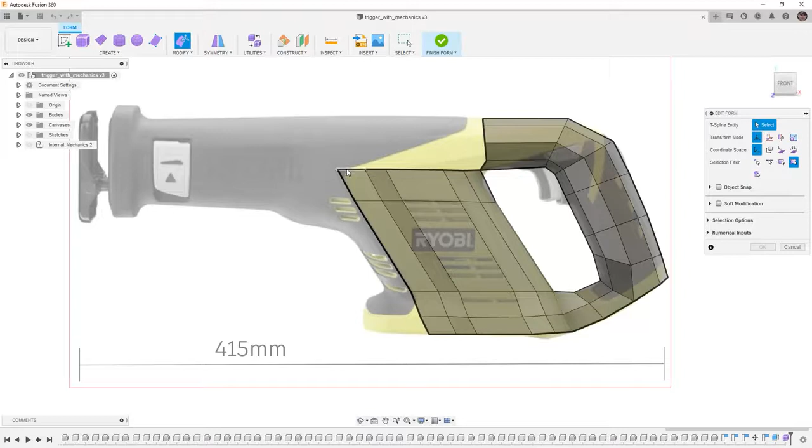We're going to go right back into edit form, and we want to grab all of these upper edges. Once again, we can double click to get the entire loop. We're going to hold down Alt on the keyboard, and we're going to bring this up. I'm going to do this a few more times. And what I'm trying to do is I'm trying to match the shape of the handle.

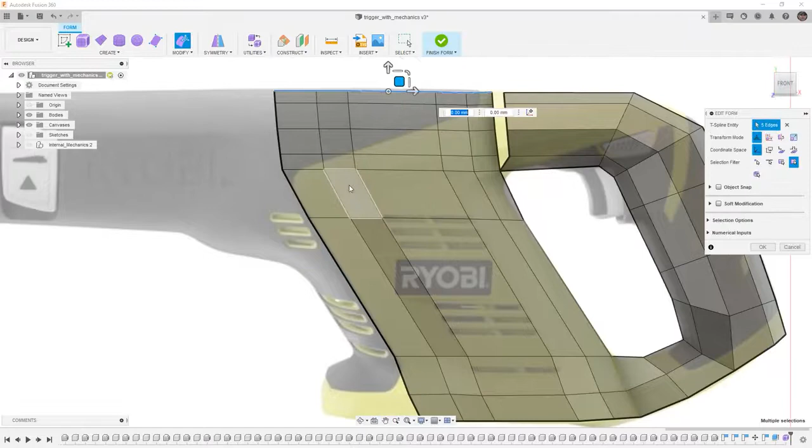Keep in mind that as we're doing this, if we rotate this model around, what we're actually doing is we're bringing this entire piece up. Now, when we look at this, this is obviously problematic because it's not going to be a smooth blend between here. Now, when we did this on the bottom, we used bridge, and you can see that this bottom edge is actually pinched in a little bit.

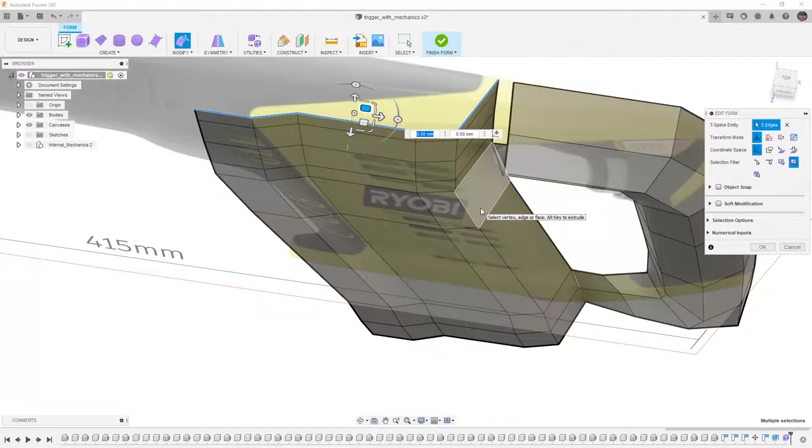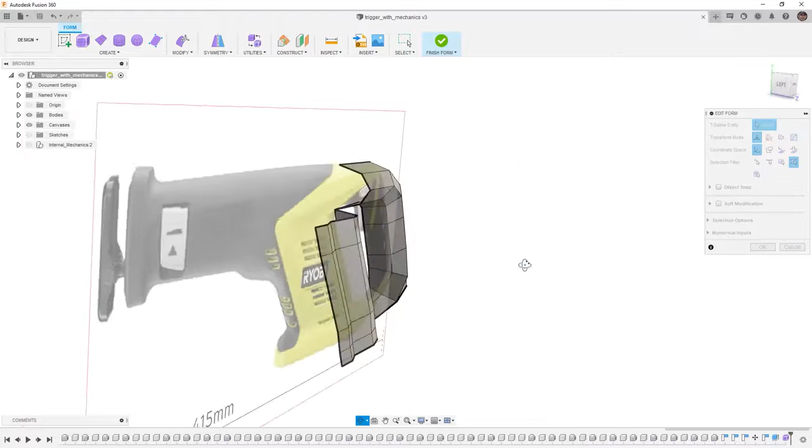So let's take a second to step back and understand that when we're working from a side view like this from 2D, it's a little bit more difficult for us to envision what the 3D shape is going to look like. Because of that, I'm going to use Control Z and undo back to this point. And now that I'm aware that things are in 3D and they're not quite lined up how I would expect, what I'm going to do is I'm going to come back and I'm going to move some of these edges out to get a better shape.

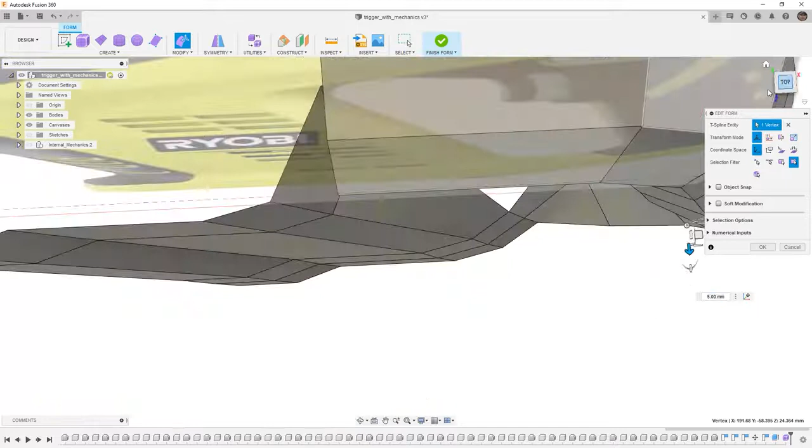So I want to pull this edge out, and this bottom vertex here, I'm going to pull this out. And once we get a few of these out, what we can actually do is go to a top view. And you can see here the handle is obscuring this, but what we need is we need to pull some of this geometry out so that we're happier with the 3D shape.

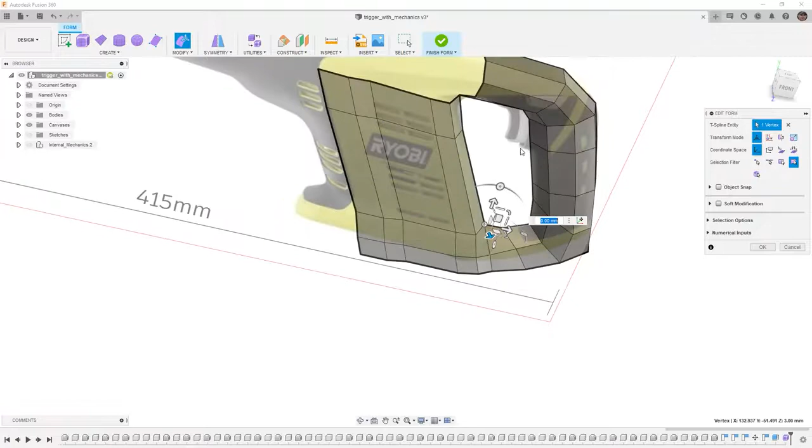Let's go ahead, and this point is going to have to be on the midline. It's going to have to be all the way in. We might need to add a few more edges or a few more ridges in here to get the entire shape that we're looking for. But right now, this gets us pretty close. Let's just make sure that this bottom edge is pretty flat and how it rotates in is okay. And then maybe we'll take this one point and we'll bring that out a little bit more.

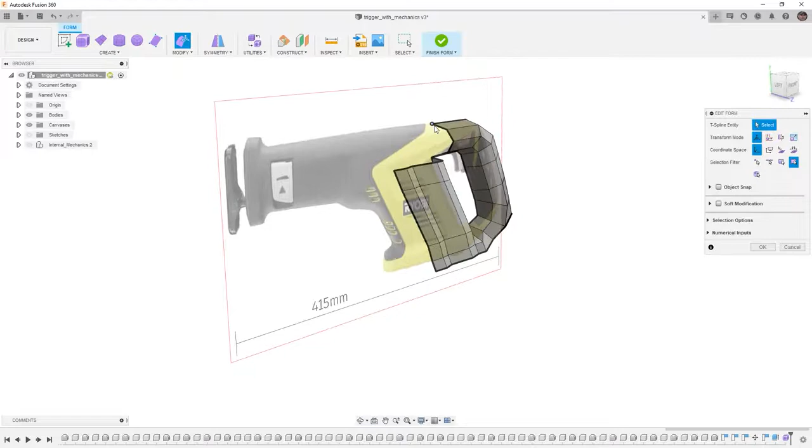So now that we have that bottom pulled out, knowing that we can go back, let's take a look at how we can blend these shapes together. So I'm going to use a tool that we haven't used yet, and that's Merge Edge. So I'm going to select Edge 1 and Edge 2, and I'm going to allow them to be merged together. So you can see that's very similar to us welding those vertices together. It was able to take those two edges and simply pull them together and get us that nice smooth division.

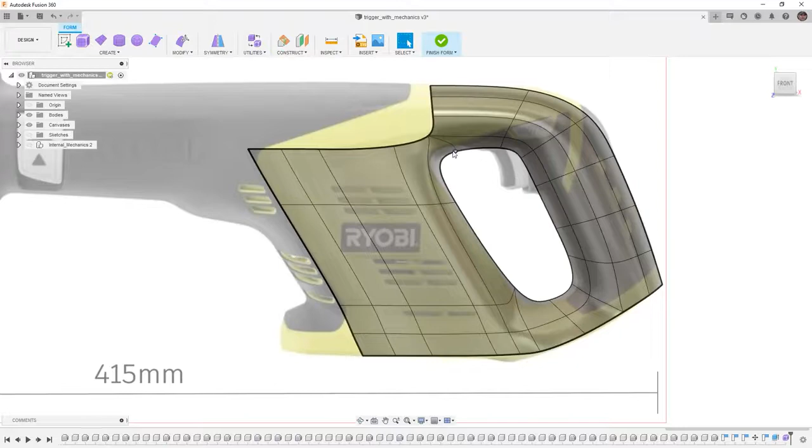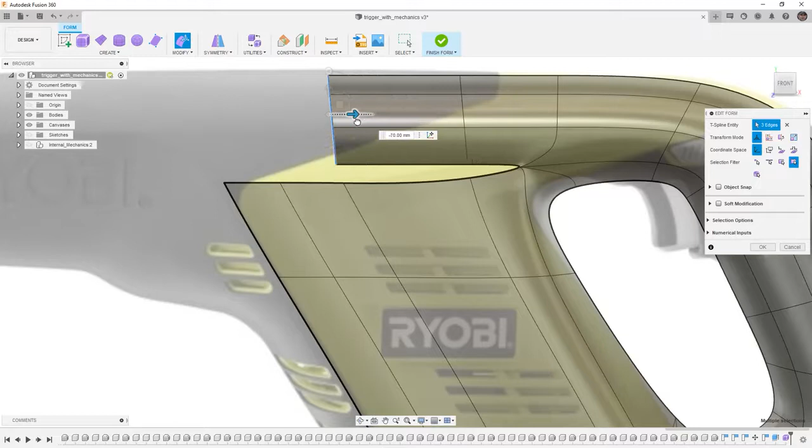Now that we know that we've got this rounded portion here, what I'm going to do is use Modify, Edit Form, and I'm going to take a few of these edges. I'm going to go to a front view. I'm going to begin extruding them forward. I want to make sure that I roughly match where these divisions are. So every time I get close to one, I'm going to let go of Alt. Then I'm going to hold Alt down and do it again. Let go of Alt, hold it down again, and then we'll do it one more time until we have the same number.

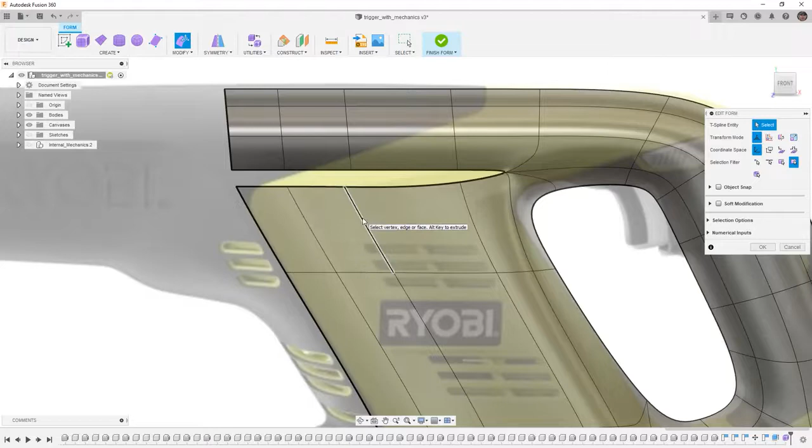One thing that's great about the T-splines functionality that we're using here with these form tools is that we don't necessarily have to have the same number, but in terms of the surface quality and the best practices, we do want to make sure that we are trying to stick to four-sided patches.

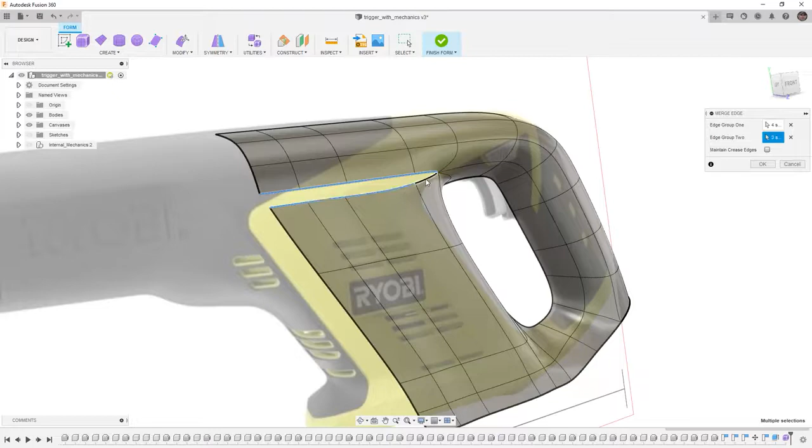What I want to do here now that I have these edges is I'm going to select multiples and I want to pull them out to be a little bit closer to this shape. Then I want to go in and I want to use that merge edge. So for edge group 1, I want to select these 4, and for edge group 2, I'm going to select these 3. I'm going to say OK and allow it to put those together.

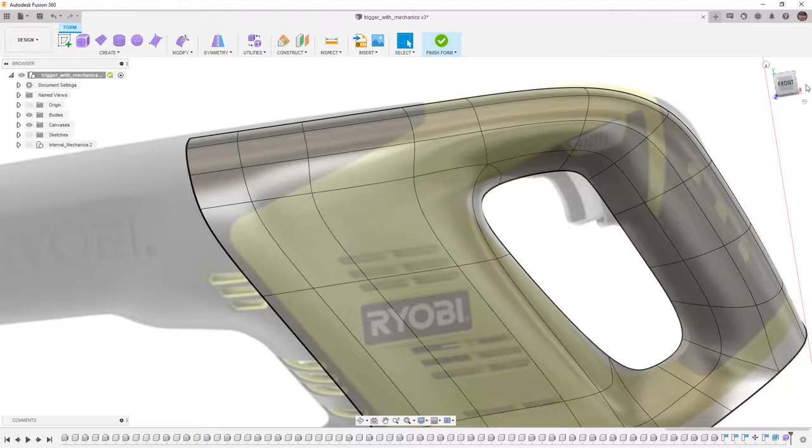One thing you'll notice that happened is it welded those together, and even though we had the same number of divisions, you'll notice that those vertices are not aligned. So if we come back in and we use weld vertices, I can put those two together. If I try to select more, you can see that it's allowing me to just continue to make those selections and smooth out those divisions that we created.

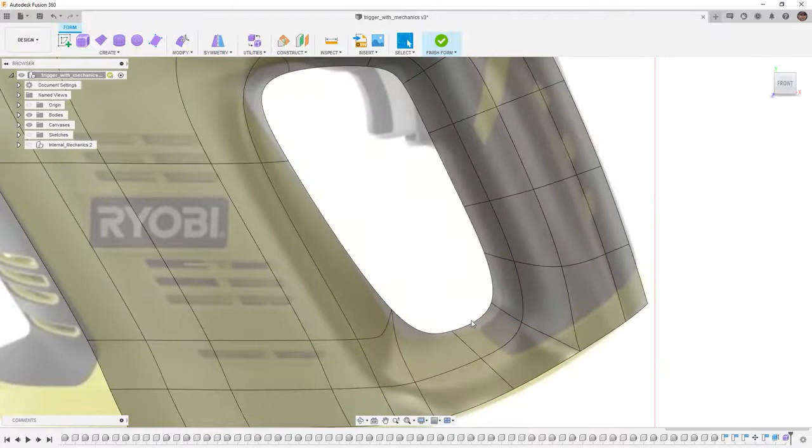Now it's important that we stick with these quad-sided patches, those four-sided patches, and then any additional loops that we might want to add or any additional changes that we might want to make, we can do that at any point in time. We can always come back and make edits, but it's important that we get fairly close to our shape with the fewest number.

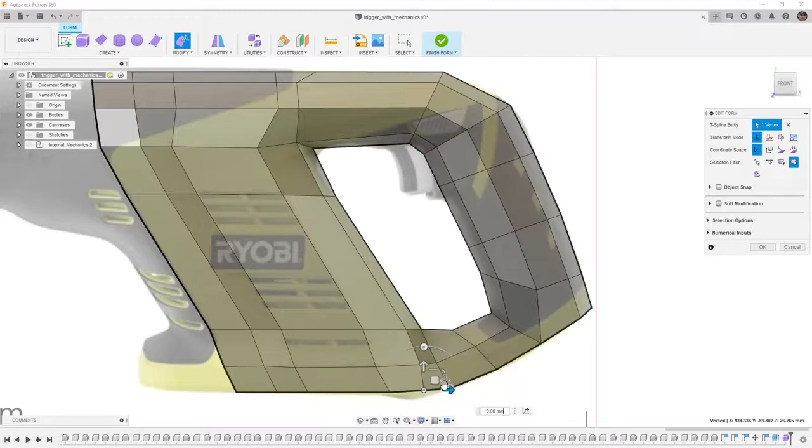So again, going back and forth between the display modes, I'm going to come back in here. I'm going to start pulling some of these forward. I want to make sure that the underlying shape is matching what I expect. So some things will get pulled back, some things will get pulled forward, and I really want to try to smooth out or normalize this shape. This edge here probably can come up a little bit. So I'm going to shift select or control select multiples. Then I'm going to pull that up.

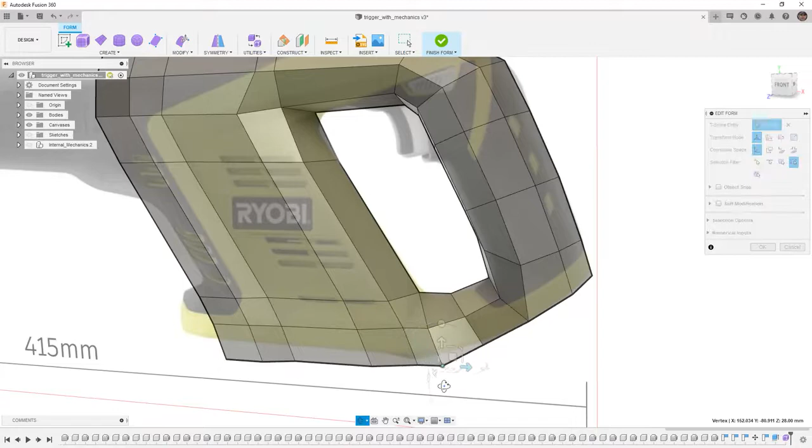Then I want to take this one here and just simply pull it back a little bit. And I'll do the same thing with this, keeping in mind that we can move around in plane. And that's going to be a great option whenever you want to stick to like an XY plane or an XZ plane. Then I'll go back and forth between that smooth display and that box display to make sure that what I'm doing here looks pretty good.

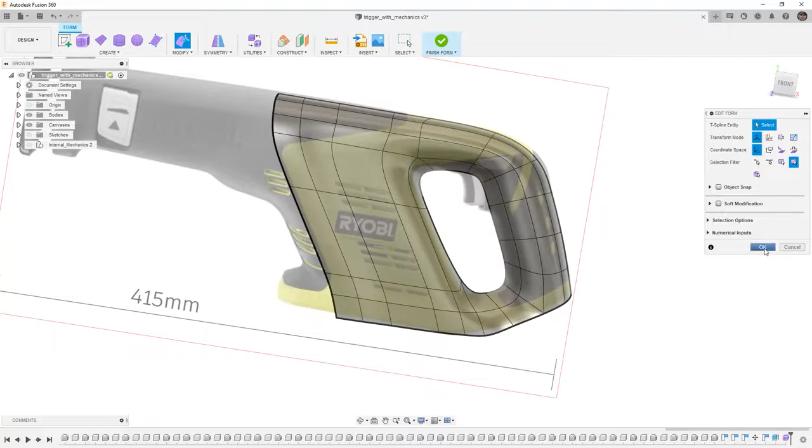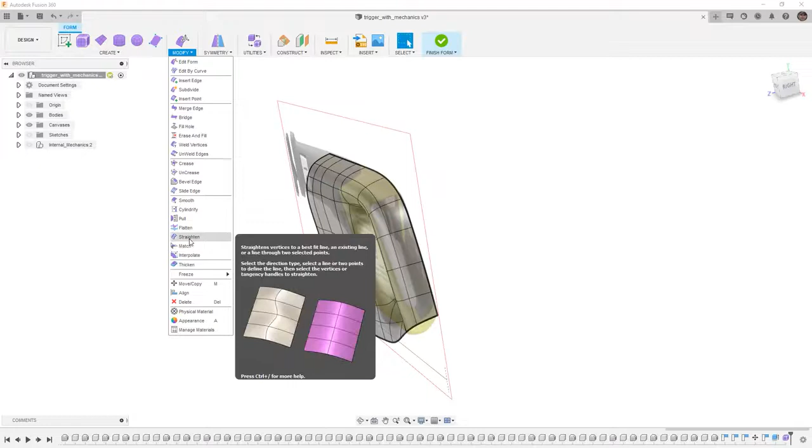There is a lot more that we can do to this body, but we're going to stop at this point because we want to mirror it to the other side and we want to thicken it into something that we can use. So the first thing that I want to do is I'm going to go to Modify and select Flatten. Now when we look in here, we've got a couple options that seem like they might work. Match will let us match a sketch. Straighten will let us sort of straighten the underlying edges. But Flatten will let us pull all of these edges, these ones that are on the inside, to that midplane.

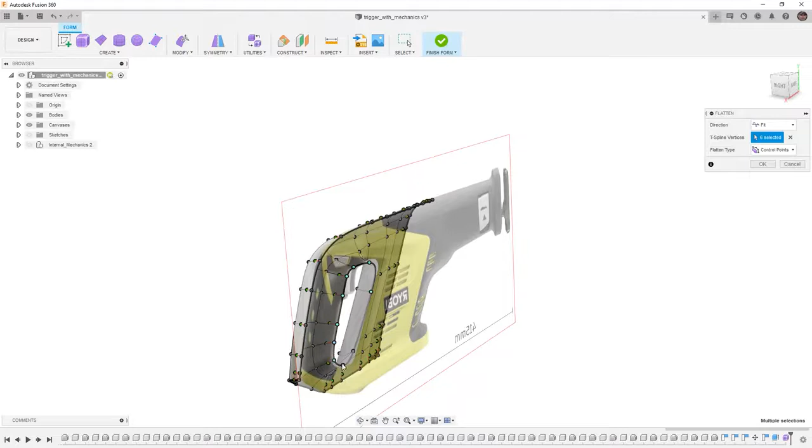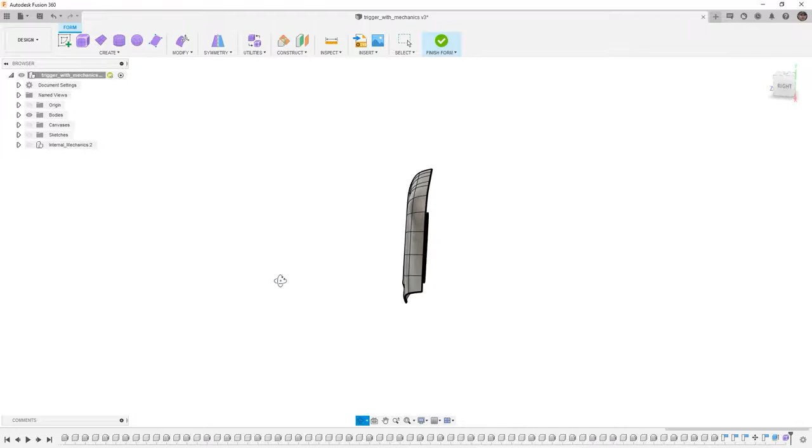So what I want to do is grab all of the edges that I'm interested in. In this case, these are going to be all the different vertices that are on this inside of the handle. And I want to pull it to a selected plane, all the way into this XY plane. And again, I can do this with any number that I need, but I'm going to do this in two separate operations. So now that I have those, I want to go into my canvases and just hide the canvas for right now. And I'm going to go to symmetry.

Now, when we have symmetry, this means that we can just manipulate the vertices, the edges, the faces on one side, and the same change will happen on the other side. This is a great way to model objects like this where they're symmetric almost completely. Now, of course, there's a locking mechanism that's only on one side of this, or the trigger might be on one side.

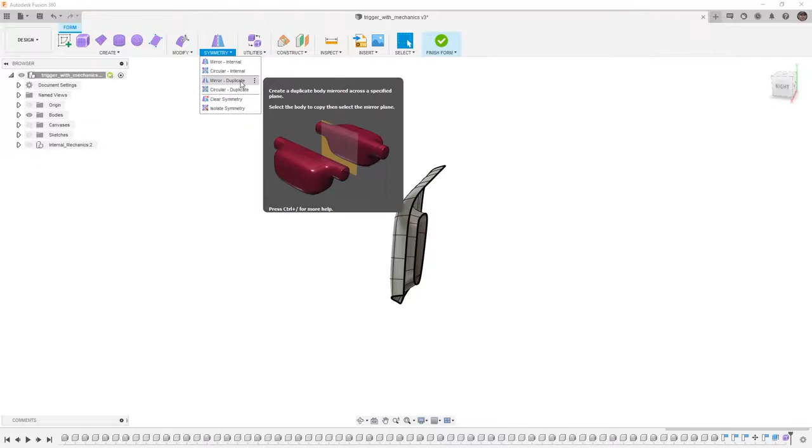But for the most part, when you're creating the basis of these designs, you want to use the symmetry whenever possible. So there are two different ways that we can do this. We've got mirror internal and mirror duplicate. Now, while it might seem like internal is the right choice here, we're actually going to be using mirror duplicate.

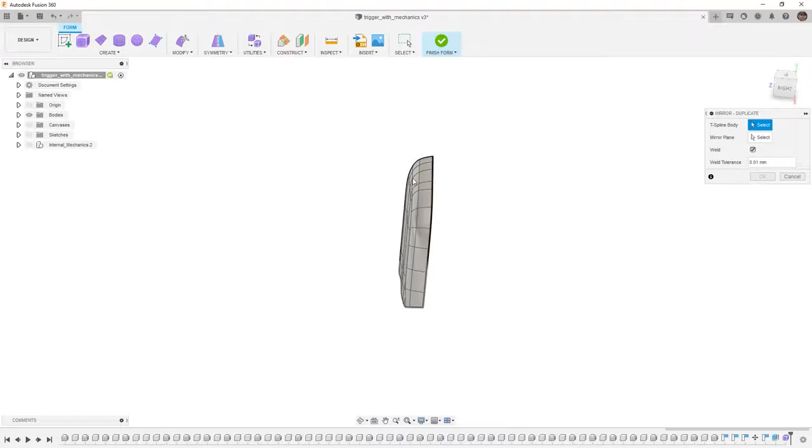When I do this, notice that it wants me to select faces on two sides of a plane. What I really need to do is I need to create a duplicate of that on another side. So I'm going to select my T-spline body. I'm going to select the mirror plane, and then I'm going to say OK.

Notice when I do this that there is a green line on the inside of the handle, but here there is a gap because we never flattened this outside edge all the way to that midplane. So this only works if we have done the prep work to make those two actually line up with the mirror plane. We can still fix this by going to Modify and Merge Edge.

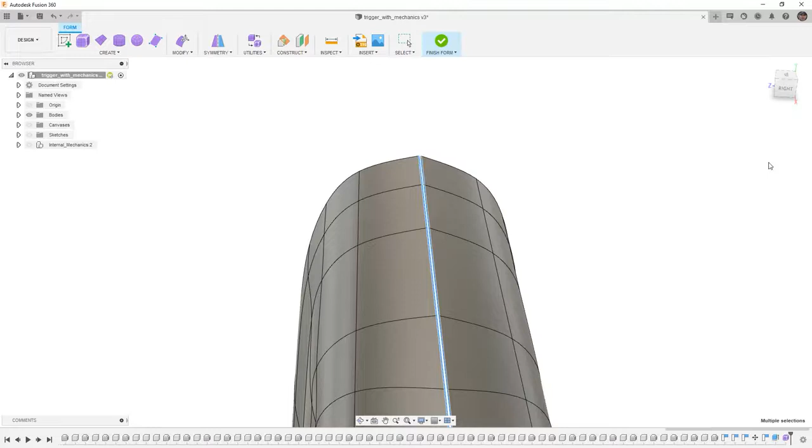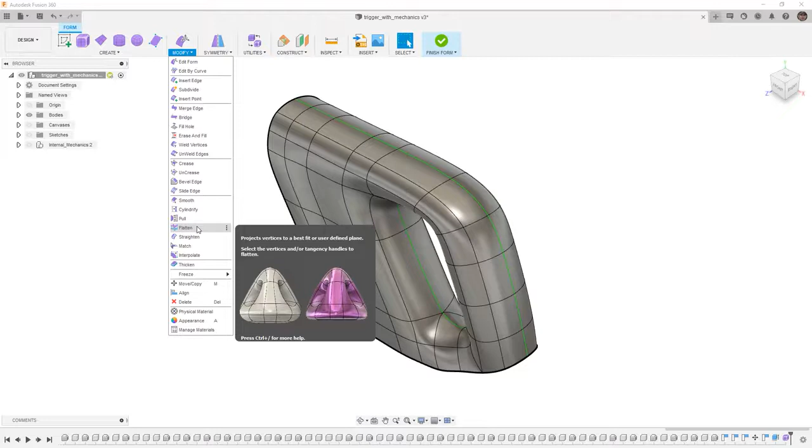I'm going to double click this one, and then for edge group 2, I'll double click the other side and I'll say OK. And it's able to pull them together all the way around, and you can see that we've got that green line. So as we're doing these types of modeling operations, there is a process that we should follow. For example, making sure that we flatten everything or that it crosses over that mirror plane. And that way we can make sure that we actually are getting that internal or external mirror.

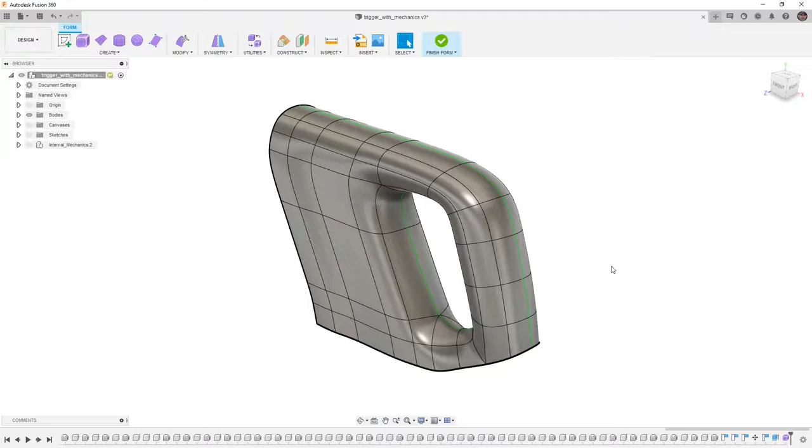Now, if I use things like Edit Form and I select faces and I pull them out on one side, they move out on the other side. I'm going to use Control Z to undo and cancel that because I don't want to make any further adjustments to this. The last thing that we want to do to this example is we want to make a solid body out of it. And this can be done either in here with the form tools, or it can be done after we finish the form. Now, there's a reason why you would do one over the other.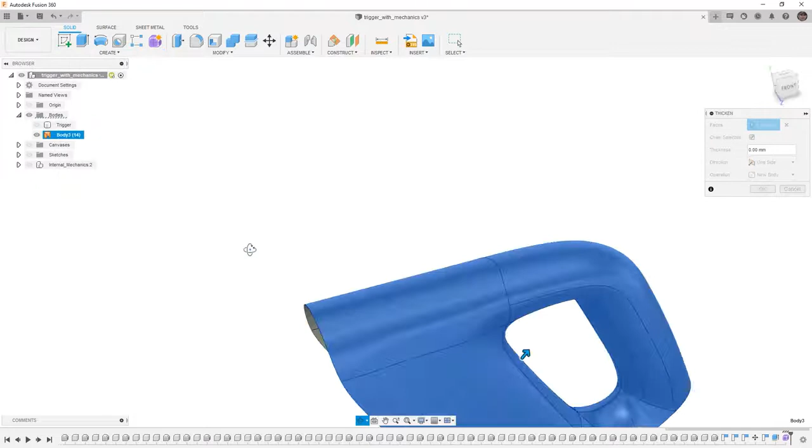Now, if we finish form and we take a look at our bodies folder, we have a surface body. From here, we can come in and we can say create thicken, and we can determine how thick this needs to be and which direction we want it. For example, if we want it to be 2 millimeters thick, we've now turned this into a solid body by using that thicken on the surface.

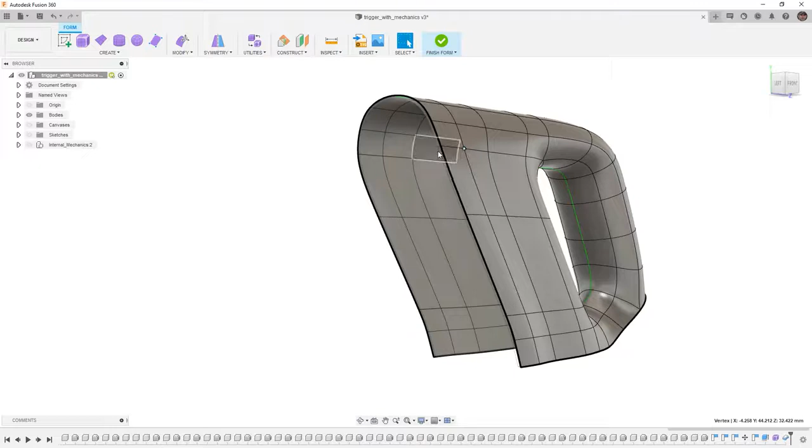However, if we were to have done this when it was a patch surface or the subdivided surface, what would happen is that we would now have control over the vertices on the inside and the outside of the body. So if you're ever designing something that has a variable thickness, maybe you need to have more thickness in one area over another, you can do that by thickening it in a form body rather than as a surface once you exit that form.

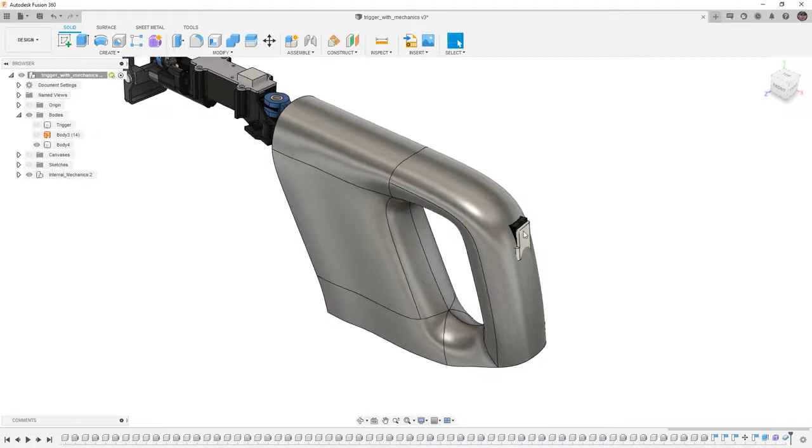Of course, there is more that can be done here, and I always suggest that people take the time to play around with the form tools. It's not an exact science, there is very much an artistic aspect to it, but this gets us pretty close to some kind of a design. You can see that there's still a little bit more work. The components are touching there. We've got room for the motor on the inside, but there's obviously a little bit more work that would need to be done to make this handle fit around some of these components.

But it gets us pretty close, and it allows us to explore a different set of CAD tools that aren't necessarily traditional in a sense. We're not creating sketches and we're not creating extrudes. We're using more of that artistic approach. From here, it's always important that we save often, so make sure that you do save your design before you move on.